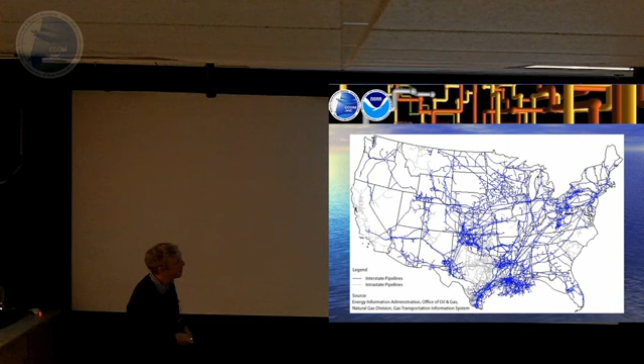That's another typical picture. This pipeline goes for thousands of miles across the steppes and all the other terrains carrying gas, oil, other stuff. And I'll tell you more. There are lots of pipes inside us as well. So this is the network of pipes in the United States. But inside us, there are approximately 28 feet of intestines. And bloody hell, 60,000 miles. Yeah, that's impressive. But that's all just to prove the point that my research is very, very relevant.

So pipes require regular inspection. That's clear, right? Reasonable question: how can this be done? And the answer is clear as well. Of course, with pigs. Right? Pigs, crawlers, and cable systems. So what is a pig? It's a pipe inspection gauge. And these are huge things. You can see the guy over there. And they travel for thousands of miles checking for various cracks, usually using ultrasound and leakage of magnetic flux, and they are cleaning pipes as well.

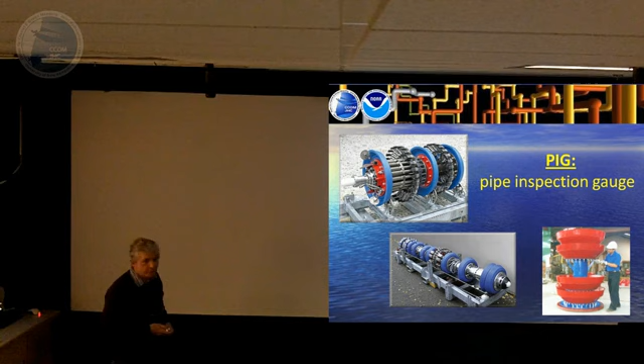Are these autonomous? Yeah, they are autonomous. They just get in on one side and get out on the other side. But obviously they prefer straight pipelines or pipelines not bending very much. So what happens if the pipes have a smaller diameter than these things? We use crawlers. Crawlers are wheeled machines, and they are using visual techniques to inspect the pipes.

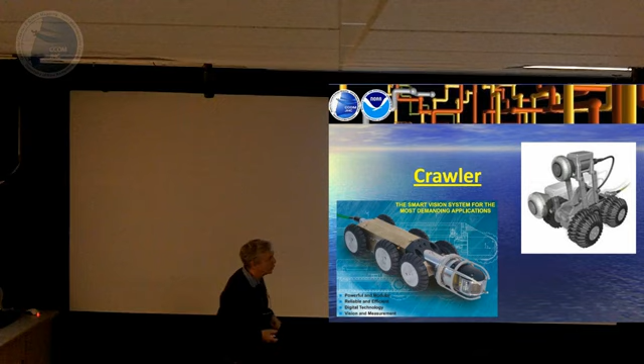So in particular, this, you can hardly see the pointer, can you? Okay. So this beast is very, very clever. It's traveling along the pipe and doing that all the time. It collects like 2-inch stripes and creates a mosaic from it. Without actually doing the mosaic, it just builds something which is easy to look at, easy to record, but again, this would fit only in that big a pipe.

So what happens if we have even smaller pipes? For that, we use the cable and camera solution. At the end, there is a video head and a source of light. The light is illuminating the inside of the pipe. The video head is taking images. These images are transmitted to the top side because the operator cannot fit in there. And the poor operator has to spend hours and hours watching live or recording this video, so it can be watched later on. It's not very convenient and it's very, very boring.

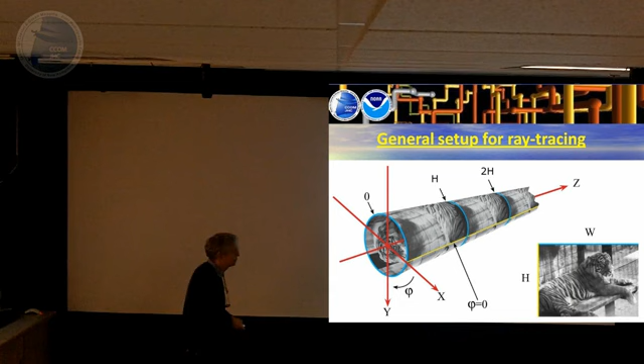This is a typical simulated image. If I take the image near the main axis of the pipe, with the camera looking almost along the pipe, that's what I see - very similar to what you saw with the rat, except for non-modeled illumination conditions. Here I can actually see very far away; otherwise it would be dark. It's almost useless.

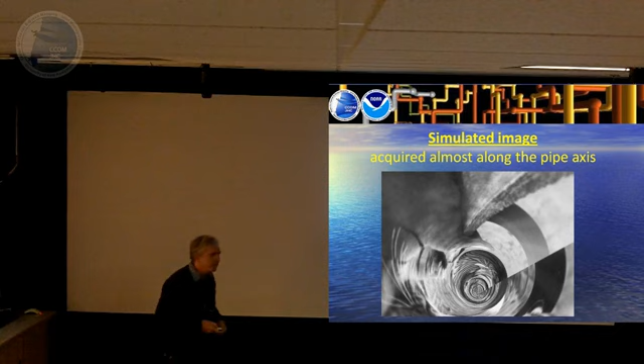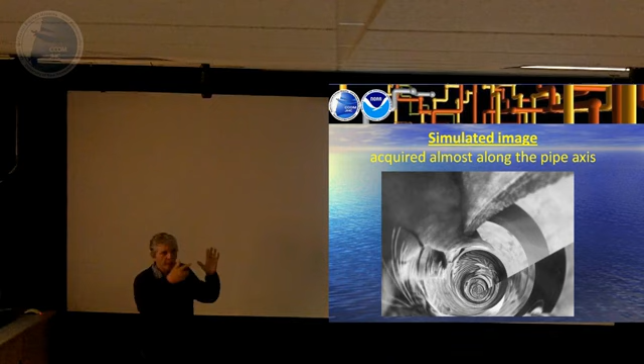The optimal conditions, from my point of view, are when the camera is near one side of the pipe and looking almost normal to the opposite side. Then almost everything the camera sees is in the near range, well illuminated, and easy to deal with.

So this is the algorithm - I don't expect you to read that, and I promise I won't ever have a slide like this again - but just a few points about it. Frames are corrected for lens distortion, which of course isn't needed in the simulation case. Then special characteristic point features, called salient features, are extracted from two consecutive frames and matched. On the basis of this match, I construct the fundamental matrix, which relates two views of different cameras of the same scene.

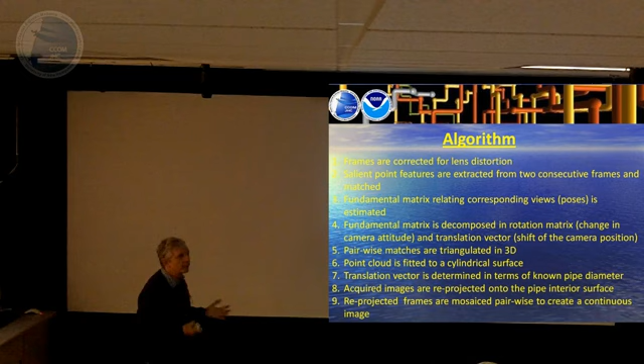This fundamental matrix can be decomposed into a rotation matrix - how the camera rotated from one view to another - and a translation vector, which is the shift of the center of the camera. So the camera could shift and rotate. After that, I can triangulate these points in 3D, and I know that these points should fit some cylindrical surface because it's inside the pipe. That's the advantage I have. Then I can express the translation vector in terms of the pipe diameter, which I know a priori. So that solves that problem.

Then I can take these acquired images, reproject them onto the pipe interior surface, and create a mosaic image because all of them are flattened. It's as if I take the pipe, cut it along its length, and then flatten it.

So that's an example. I just took a bunch of random points, spread them on the inner pipe surface, then took two views of these points from different positions with different orientation and position of the camera, and that's what I've got - they look the same. I can match them; I can see that this constellation is very similar to that constellation, and determine that this is most likely that, etc. Then I can do the matching, and that's how it happens. For example, these are three simulated images I generated, rendered of this tiger pipe.

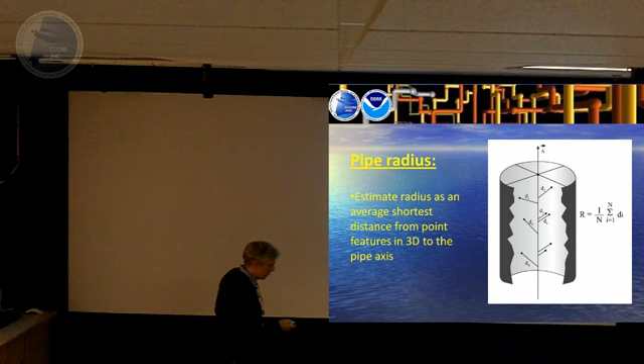I need to say that when I take the fundamental matrix and decompose it into the rotation matrix and translation vector, it can be done with a 4-fold ambiguity. There are actually 2 rotation matrices which satisfy the same solution, and the translation vector can be found only up to a sign and a scale.

Fortunately, some clever Greeks invented the notion of chirality - a very good Greek word, use it if you want to impress someone because nobody knows how to spell it. Chirality is actually a simple thing: all you want is that all the points you're looking at are in front of both cameras. Obviously, if a point were behind a camera, how could you possibly see it? This chirality constraint allows you to remove 3 of the 4 ambiguities.

The 4th ambiguity is the scale, and nothing can be done about it. But fortunately, the pipe radius is known in units of the translation vector. So since I know the pipe radius in real units - inches, centimeters, or whatever - I can find the translation vector in real units. Now I know the camera's attitude, its position with respect to the pipe, and I can reproject a given frame onto the cylindrical surface by ray tracing.

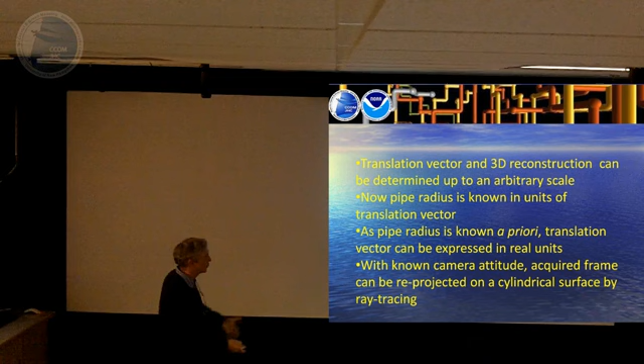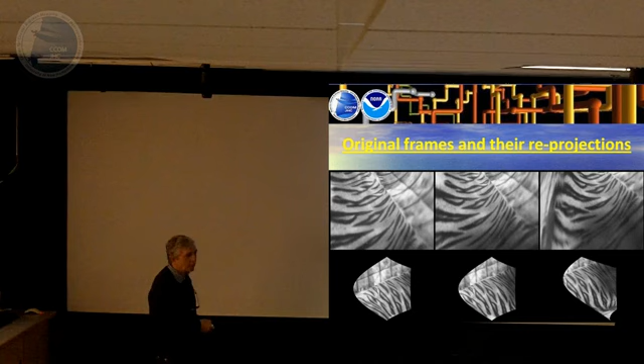So that's the result - these are acquired images, and these are the reprojected images, and of course they look very, very similar. You may have some trouble finding similar features in the original images because they are so distorted, but these reprojected images are not distorted, so there's no problem combining them in a sensible mosaic.

And then the question arises - there is always some error. In simulation there are supposedly no errors, but in fact there are some, and I'll talk about it. Errors are inevitable, so how robust is the procedure with respect to these errors? So I took